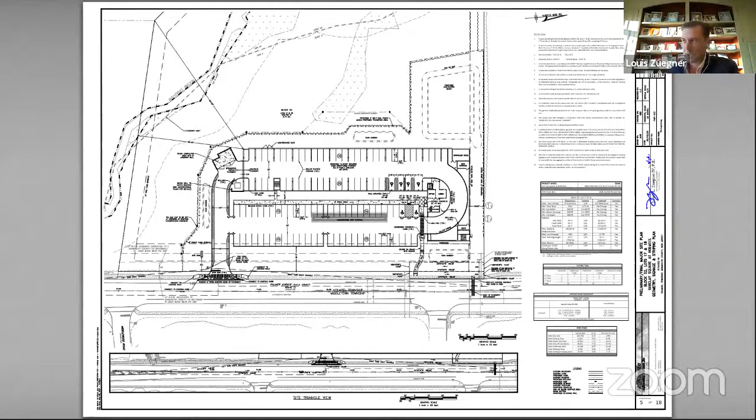What I'm presenting right now on your screen, and hopefully you can see it, is sheet 5 of 18 of the plan set we resubmitted. One of the key elements in what we did, as you know, we actually have good headroom under the building, but in this gap from the last hearing, we found out specifics on Holmdel's tallest ambulance, and that tallest ambulance would not fit under the building in the garage.

So what we've crafted is a widened space. The striped space right here between the handicap spaces, which would normally be 5 feet, is 12 feet in this plan. And that provides a very easy, accessible turnaround or spot to pull in an emergency for an ambulance. We thought that was a good solution in that hopefully not too often circumstance, but an ambulance could turn around at that point.

The second thing we did, there had been discussion on a number of basin and grading items through the previous several hearings. So we, in this plan set, addressed that. Those are the areas along our northerly property line here, of course in the basin itself, and as it comes out to the street. We revised that grading throughout to ensure that all potential water, even in the biggest storms, has no chance of going over the property line.

And the way we did that was, for the 100-year storm, to lower the water surface elevation, so how deep it would get in the pond. We lowered that. That allowed us to lower all the elements in the pond and ensure that all the grading worked properly. While we could have made it work in the basin alone, we heard all of the different comments and concerns, and we've added additional storage under the front parking lot so that we have an added element of safety in terms of flood mitigation.

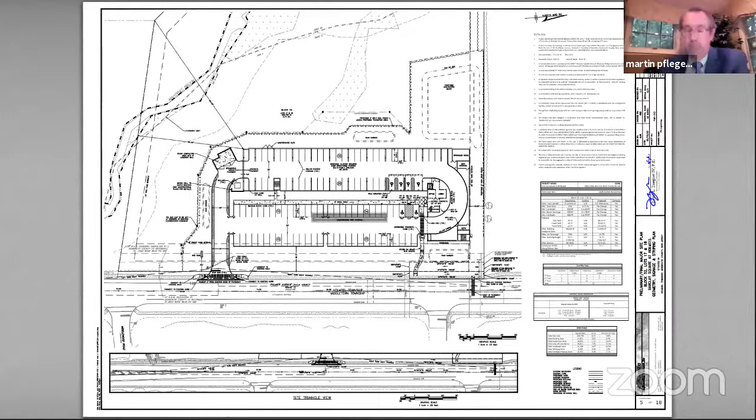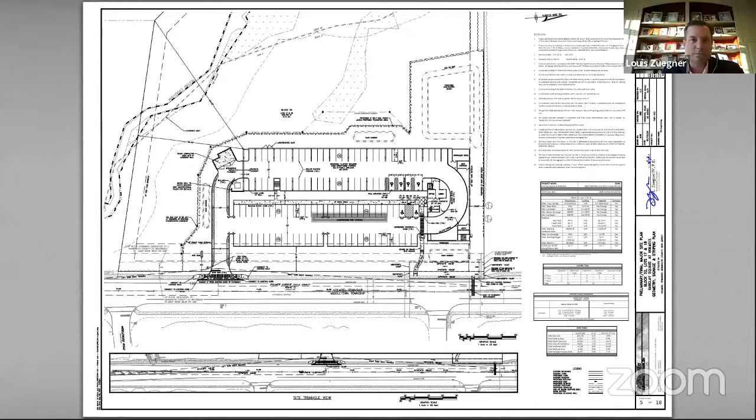Okay, do we have any questions from members of the board? Chairwoman, I do. Okay, go ahead. Committeeman Santana. Yeah, could we take the share screen off, or is it going to be there? It's a little distracting. So I can take it off. Maybe we can put it on if somebody else has a question. Thank you. Hi, Mr. Zuegner. How are you? I'm good this evening. How are you? Good, thanks.

So okay, I have a few questions. So let me start with the groundwater mounding report. As I understand it, you've created two scenarios. One, assuming a 4.6 permeability rate, and then you used an adjustment factor 1.62 to lower it, and did a second scenario. I'm assuming that the 1.62 is a standard industry factor that you use to take a conservative estimate?

Yes, there are a number of sort of parameters, that one included. And also you go through a process of determining what's the overall depth of the aquifer. The aquifer here is probably much deeper than what we've shown. There were some other studies in the area that show it much deeper, but the borings we have on our site were at 19 feet, so we showed that. And the second analysis comes based on timing, sort of a modeling. You look at it in different time scenarios as well as just permeability.

Yeah, but I just want to make sure that the 1.62 number, that's a crucial number based on the analysis that I reviewed. So I just want to make sure it's a number used in the industry to create a, wow. I didn't say anything bad about the dog. So it's a number that's used to create a conservative scenario, right? Could it be 1.72? Could it be 1.82? Or is that a standardized number? Or is it a random number that's chosen?

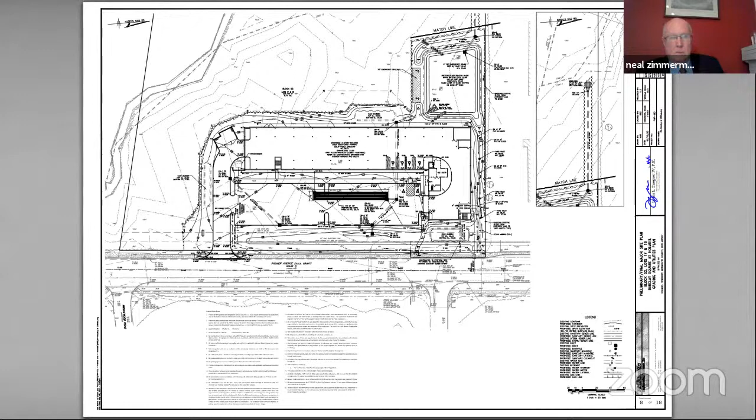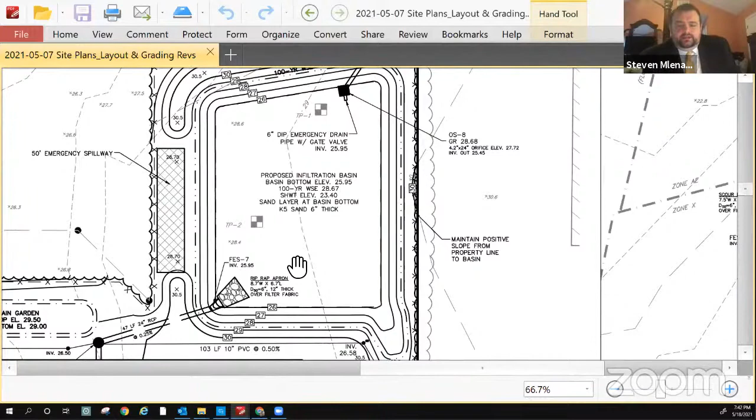All right. Could you identify the lines around there which represent the 100-year storm elevation? So 100-year water surface elevation is at elevation 28.67. And it's this contour, you can see is 28, and then there's a dashed with 2 dots line that falls within this pond that would be the 100-year water surface elevation. Okay. And if you travel down, looking directionally on this plan, north to south, I think in reality west to east, towards Palmer Avenue and follow that line along towards the bottom, does that line not encroach upon Palmer Square property?

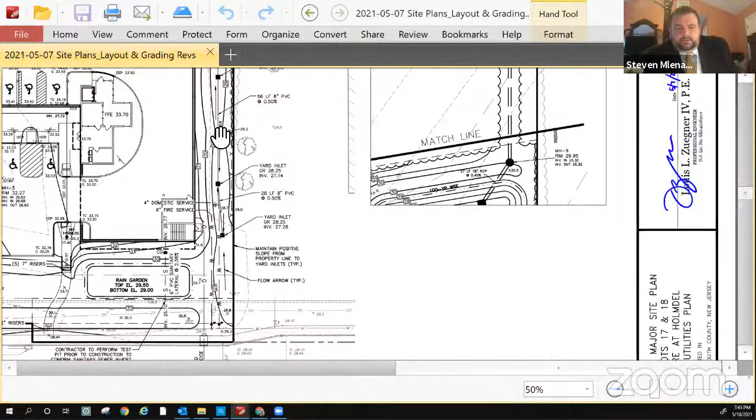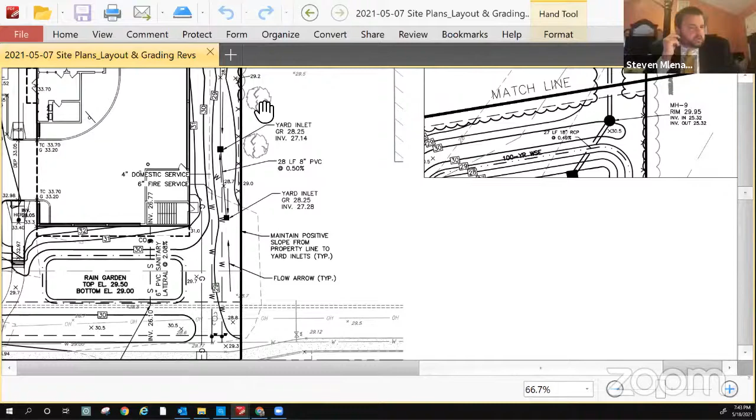Well, this dashed line is entirely within the pond. There's a 29 contour, which is above that. And what we've done is we've ensured that we get drainage into these inlets and off of what's right now a low point that straddles the property. So I can't not connect that 29 contour that's above it because it's on your property. I could fill it in if you wanted me to go on your property, but I can't do that. And so we've connected it and we've kept the 100-year water surface elevation below that spot shot on the property line. All right.

And then going back up to the basin, you show what appears to be, and I'm not an engineer, on top of the basin there, again directionally as the plan is laid out, a berm up top that kind of bull noses. Here? Yes. Is that correct? Yes. And then there's another berm on the bottom of the basin, and then a spillway in between, correct? Correct. There's no berm or artificial berm planned for the side of the basin facing Palmer Square. Is that correct? Well, effectively there is.

So again, it's sometimes deceptive in contours. This is elevation 30, the berms you've talked about. The property line is elevation 30. And then the spillway is at elevation 28.7. So the property line itself, correct me if I'm wrong, serves as the natural berm? Well, we're not touching the contour. We're leaving that property line as it is, and then we excavate on our property. So essentially we're coming down onto our property. And then where you're looking at the contours, we then build up to match those elevations. And that's how we've created the pond.

Okay. With respect to the mounding study, understanding that there are no basements in the building directly next to it, that being Ambrose Court, approximately how many feet could there be an impact to a basement from the basin, if there were a basement? Well, again, going back to what I was talking about with the board member before, this is really a 3-dimensional perspective, right? You would need to see where a basement is. So if a basement's above this groundwater elevation, then there's no impact to it, no matter how close or far it is. So it really has to be looked at as a 3-dimensional impact.

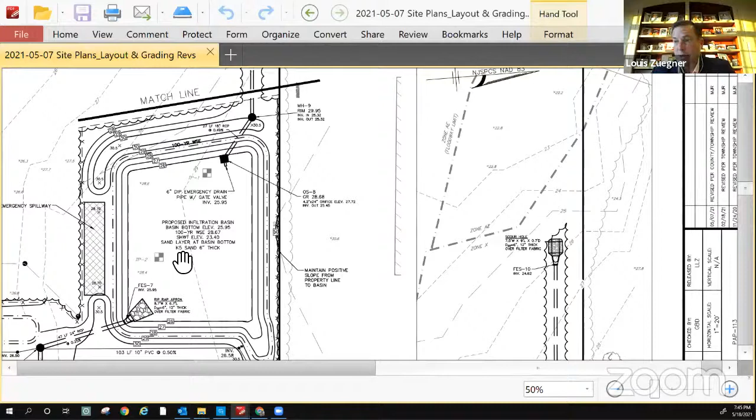So, when you say, could there be an impact? No, in my opinion. I think anything outside of that 30-foot line, there's no impact. So 30 feet is around the line, you would say? Is along the line, I would say. Okay. All right. That's all the questions.

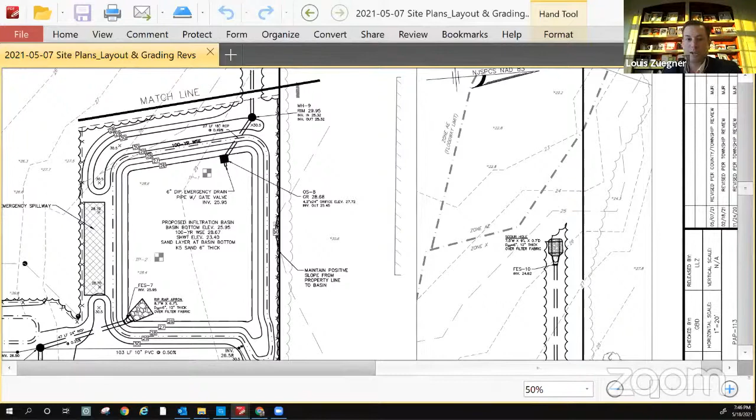I do have Mr. Murphy, who I understand is on to provide some testimony as well, Madam Chairwoman. Okay, we'll look again. I just looked for him. I didn't see him 2 seconds ago, but we'll look again. Oh, he must be on because he's texting. Is he just Brian? There he is. He raised his hand. Allison, can you let the Brian with the raised hand in, please? Thank you, Chairwoman. Mr. Mlenak, may I pull this plan down? Oh yeah, my line of questioning is over. Thank you so much. Okay.

Okay, Mr. Murphy, you're still sworn in from the last time. You may ask whatever questions you have or make whatever statements you want. Are you able to bring up the other plan? My plan, Brian? Yeah. Okay, yes. Do I have the ability to share? I do not. I am giving you that ability right now. Thank you. Surely.

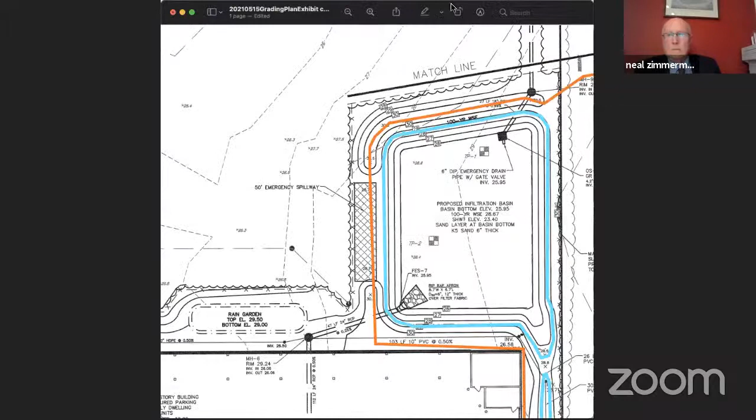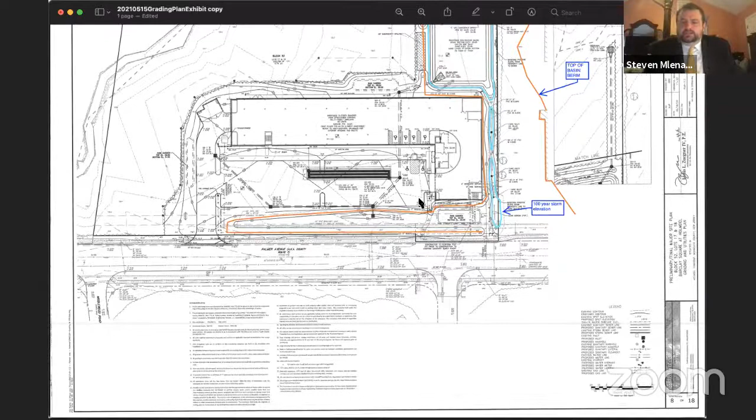Mr. Murphy, you remain under oath. You understand that? Yes. And you were here and were able to listen to the testimony of Mr. Zuegner just now? Yes. And you've had a chance to review all the plans that were resubmitted on May 10th in this application, is that correct? Yes, I did. Okay, this is the plan submitted, sheet 8 of 18 by Mr. Zuegner, and I assume these annotations were created by you? Yes, since we can't be there to mark it up ourselves.

Right. Okay. Marty, I have lost track. I don't know how you'd like me to mark this. Bonnie, do you know where we are on the exhibits? I think this may be the 4th exhibit, so I'm going to say O4. But I'm not sure if we were using O or not. We could just be safe and start with a higher number, O8 or something. You only had a few exhibits, right, Steve? I'm fairly confident this is going to be 4. I just wasn't sure if we were using O. Yeah, I think we were using O. Okay, so this will be O4. We can put O4 and put today's date in parentheses.

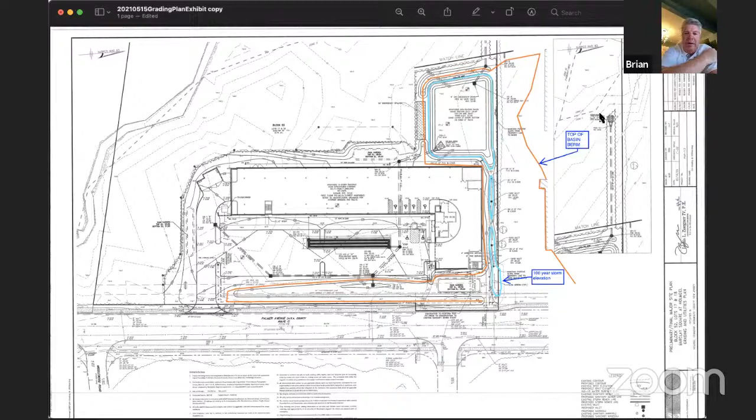That's good. Mr. Murphy, can you provide your thoughts on the revisions to the plan as well as the testimony that Mr. Zuegner just gave? Sure. Some of our comments were addressed in this revised plan. They added some additional drainage along that north end, but we still have 2 issues, and they're demonstrated by the plan before you. The blue line is really what the 100-year storm is. As Mr. Zuegner indicated, they have the elevation indicated within the basin.

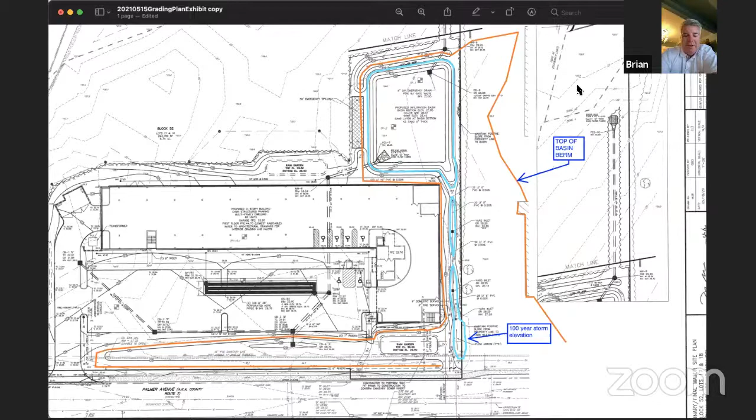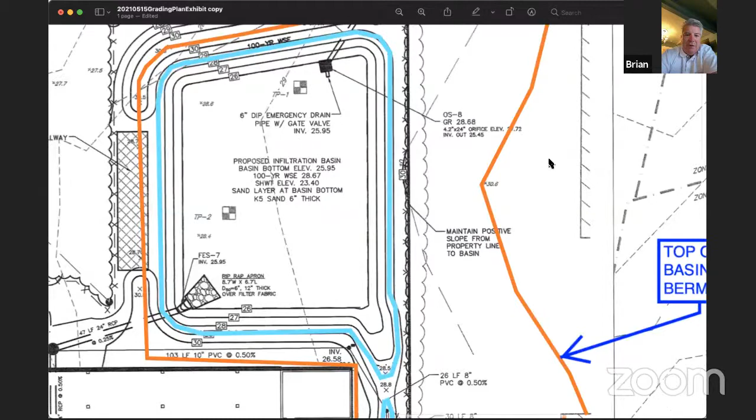Then those inlets that are connected to the basin are lower than the 100-year flood. So when it hits that 100-year flood, it would come up into those basins, which in itself isn't an issue. The problem is I believe it's still coming onto our property near the Palmer Avenue portion of the property. The other issue is the top of berm. It does not wrap around the north side of the property. That's an elevation of roughly 30.5 for the top of berm. So even if we follow the 30 contour, it basically bullnoses at the end of our property on one side and dies into the building on the other.

And you can see the existing dashed contour that comes in and touches the north end of the property and comes back out. That is elevation 30. So it's not really wrapping around and containing the basin on their site. So those are the 2 issues. The orange line is basically what's coming out as top of berm. As you can see, it comes substantially onto the property. The problem I have is if they just say, okay, we're going to berm that up and make it a 30 along our property line, it's going to create a low point along our property line and trap water there. So it's something that has to be addressed.

Can you speak to what the stormwater regulations say regarding these 2 issues? Sure, it's covered by DEP and dam safety, and also within the RSIS section NJAC 5:21-7.8 D. Basically it gets into, really, it's a minimum of 6 feet, which they have where they do have the berm, they have 6 feet, but then obviously they don't have it on the north side of the property, on the shared property line, where that berm just kind of dies off.

So you're required to have a berm, and they partially provided one, but it's really kind of coming up along our property, which is really the issue. It needs to be contained on their property. In your opinion, this stormwater plan as designed may result in spillover onto the Palmer Square property? Yeah, the 100-year, I believe it will on that corner by Palmer, for sure. And just going by the regulations, the top of berm should be contained on their property as part of their basin and their drainage structure, and it's not. It's coming onto our property.

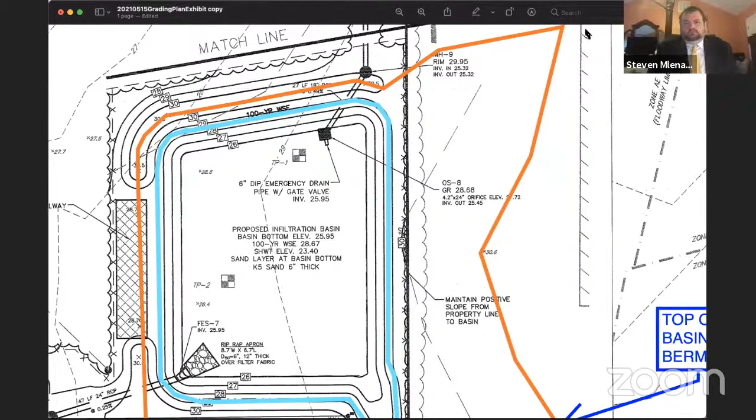Mr. Murphy, do you have any survey data other than the spot grade of 30.6 in between the one building and the property line? Do you have any data as to what the elevations are along those two townhouse structures? No, I'm looking at the existing contour that they provided there. That's the 30 contour. You can see it's roughly midway in between their basin and our building. Right, but wouldn't that 30 contour then continue in, I guess, a westerly direction and cut right through your orange line at the top of the page?

Yeah. I understand what you're saying, the 30.5. I agree with your testimony of the 100-year storm impacting the property down around Palmer Avenue. And as Mr. Zuegner mentioned, he's tying in the grades as he should. And he can possibly rectify that if he can get permission from the adjoining property to do a little bit of minor grading over there to keep everything on the applicant's property. Yeah, it's lowering the 100-year.

With regards to the top of the basin, yes, I identified that. He does provide a berm at that westerly side where the outfall is. But normally you tie back into your contours where he has it, and he tied in that 30 contour right at the property line, and everything else just flows overland. So Madam Chair, I'm going to have to research that section he just quoted, just to get a pure definition of what's considered the berm for the detention basin.

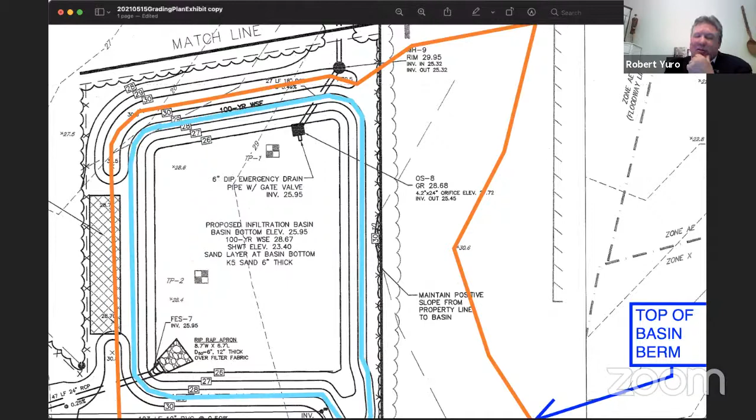But I see the design as proposed adequate for what Mr. Zuegner testified to. And again, if you zoom out a little bit so that you can see the blue line at the bottom of the page, there is a minor impact to the adjoining property with the 100-year storm that Mr. Zuegner could potentially look at, if he gets permission of the adjoining property to do some work over there. Yeah, I've just never had a top of berm be part of someone else's property. That's my bigger issue.

Yeah, but then the question is, how far do you chase that berm, if it's beyond the 100-year elevation? Well, the berm is required to be a foot above the 100-year. I think I ran that calculation. I think the spillway's 28.7, and it came up to like 28.9. It wasn't much above that, a couple tenths. So you throw at least a foot above that, so that's 29.7, and I don't think you have that around the entire basin.

And by the way, Mr. Yuro, that regulation is section 5:21-7.8 D6, which provides that the minimum elevation at the top of the settled embankment shall be 1 foot above the water surface. Again, Madam Chair, I'll have to review that section. Sure.

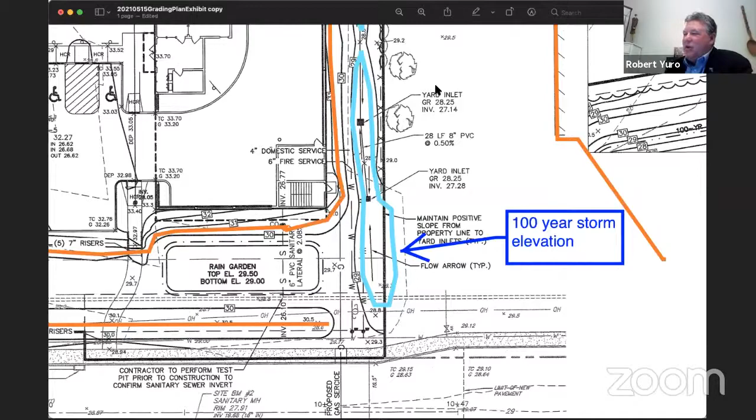Again, it's 30.5 in that isolated area, but if it's only 1 foot above the 100-year storm, then they only need to maintain that 29.7. 100-year water surface is 28.67. So, in that isolated area where the 30 contour is on the property, they meet that 1 foot. As you run east and west, have to do a little bit of interpolation to see where that would fall. Yeah, the foot measured from the 100-year flowing through the spillway, so it comes up to roughly 29.7 based off the calculations.

Okay, Mr. Zuegner, do you have any comment on that? Yeah, I just have 1 or 2 questions before we bring Louis back, if you don't mind. Sure, Mr. Zimmerman. Do you want this screen still up, or do you want to? That's fine. You can leave it up. That's fine.

Mr. Murphy, as part of your review of the application, did you take a look at the NJDEP freshwater wetlands permit and transition area waiver averaging plan dated February 10th, 2020? Yes. Okay. And that permit says on page, it doesn't have a page. Page 4, sorry. Under stormwater conditions number 2, the department has determined that this project meets the requirements of the stormwater management rules at NJAC 7:8. Do you recall that? Yes. Okay.

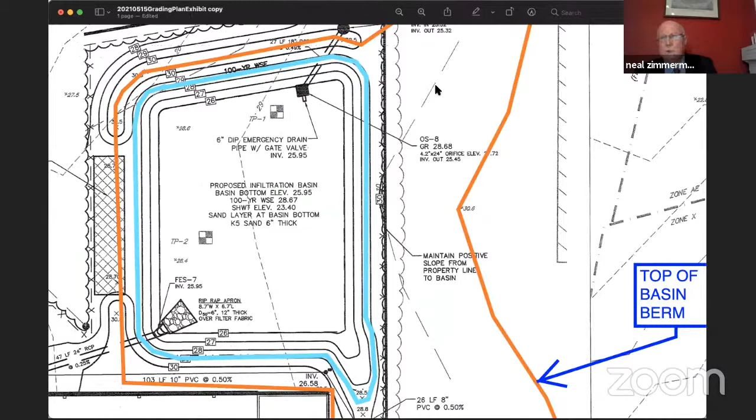Yeah, at this point, I would like to recall Mr. Zuegner and ask him to respond to the 2 points that Mr. Murphy made. Sure. Thank you, Mr. Zimmerman. I think what I would like to say a little bit here is that talking about the top of this berm and the freeboard is a little bit misleading by drawing this orange line. The 100-year water surface elevation is shown, it's in the pond. And then it spills out the spillway. At no time is the 100-year storm going off or out of this basin onto the neighboring property.

The fact that we create a berm elevation and then try and chase that across the neighboring property makes no sense. We're below the neighboring property. We're trying to get water into our basin. We've done exactly what we're supposed to do here to get this water from the neighboring property to the north into this basin. Changing it does not make sense. And then when we go further down where we've created this combination of drains and swales to capture water and get it into the basin, yes, in the 100-year storm, which remember, that's Hurricane Sandy, those little areas would fill back up with water. But based on our spot shots, it does not cross the property line.

So I think that the gentleman is incorrect on both points. All of the 100-year waters, all of that storm is contained on our property, in our basin. We meet all the rules. The berm is designed properly. We capture drainage from the north so that it comes onto our property. It is not prevented from getting onto our property where if we had built up or created or changed berms, we would cause the neighbor problems. So again, our design is proper and correct. Thank you.

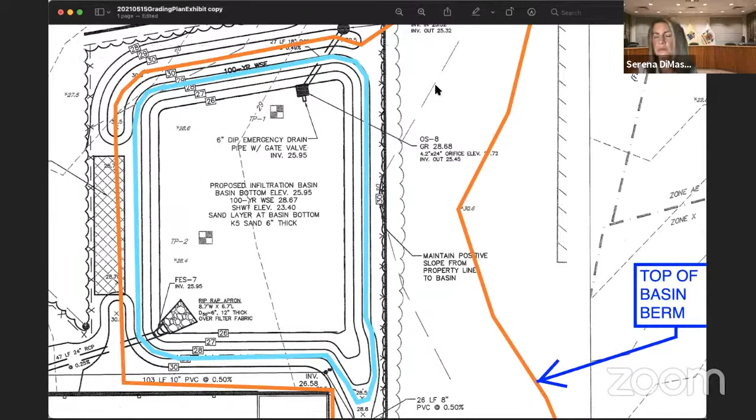Does anybody need this screen still? Okay, thank you. Do you have any other questions, Mr. Zimmerman or Mr. Mlenak? Could we possibly get some shots along that area, especially along Palmer, where I think the water is coming on the property? Because there's one spot grade up. So I'm not sure how anyone really knows what's happening there.

I'm not sure if that's a question to me or to Mr. Zimmerman. Not to me. Again, I mean, to go out and do more survey work for a matter of inches here, we have spot shots. We believe our design is correct. So we'll leave it at that. Only one spot shot, kind of the issue. And it looks like it's coming onto the property based off where the contour. Mr. Murphy, have you done any testing yourself? No, I'm relying on the plans that are provided. I'm just curious. Okay. Does anyone else have any questions?

Okay, at this time, I'm going to open to the public. Please raise your hand if you'd like to ask a question. Please remember that the questions are limited to the testimony that was given here this evening, which is about the ambulance turnaround and the mounding study. For some reason, I'm not seeing hands up, which I did last time.